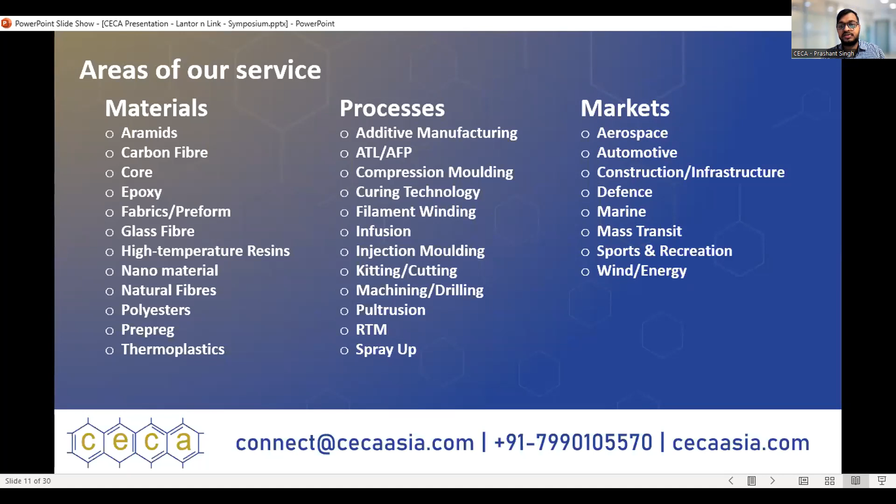The core support team of CECA includes Dr. R.K. Singh, N.C. Sharma, Chandran Kunal, Dr. Anshuman, Francois T, and Hiral Parekh ma'am.

If we talk about memberships, individual and annual membership is absolutely free. The honorary life membership is free, but it is nominated by the CECAASIA team. The corporate membership is a paid membership with ample benefits. The annual fee is 11,000 Indian rupees and 160 USD per annum. You can visit CECAASIA.com/membership to download the forms and see the benefits.

Professionals, academicians, professors, researchers, and students associated with composite manufacturing, polymer plastic industries, R&D, universities, and research and training organizations are invited to become members of CECA. The individual membership is absolutely free. Come and be the villager of World Composite Village. Help yourself and the composite fraternity.

CECAASIA has a big vision of making India the hub of composites. So be part of it, be a CECA member because it's absolutely free. Honorary memberships are granted based on recommendations from members, core members, and professional partners, and nominated by CECAASIA. Normally these are people who have served the composites field for more than 20 years and have made memorable contributions in their areas, and this membership is absolutely free.

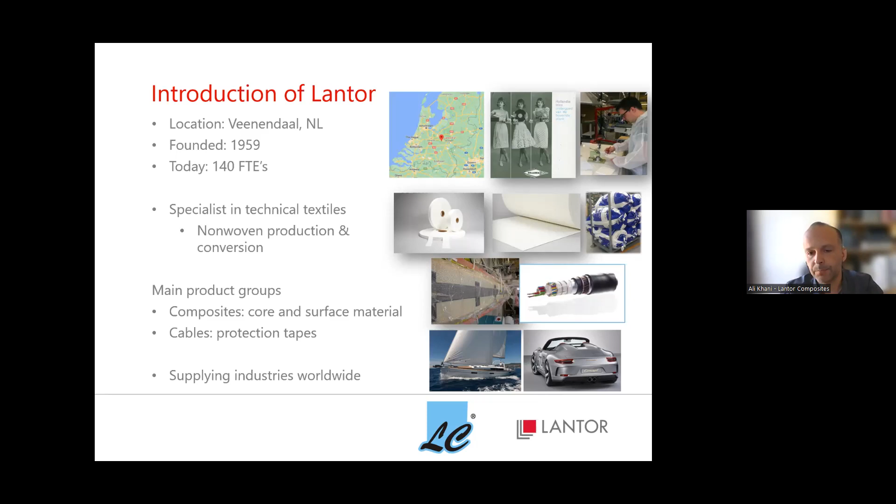We are serving different industries, and we are serving them worldwide. A large portion of our customers goes to marine, but also we are very active in other segments like automotive. So in the next slides, I would focus on the composites products.

So probably the first question which comes to your mind is, what is Lantor core made of? Most of our products are made of polyester fibers, which come from recycled bottles, PET bottles basically. So we process these polyester fibers in our production facility, and we make a non-woven veil, which is a base of most of our products.

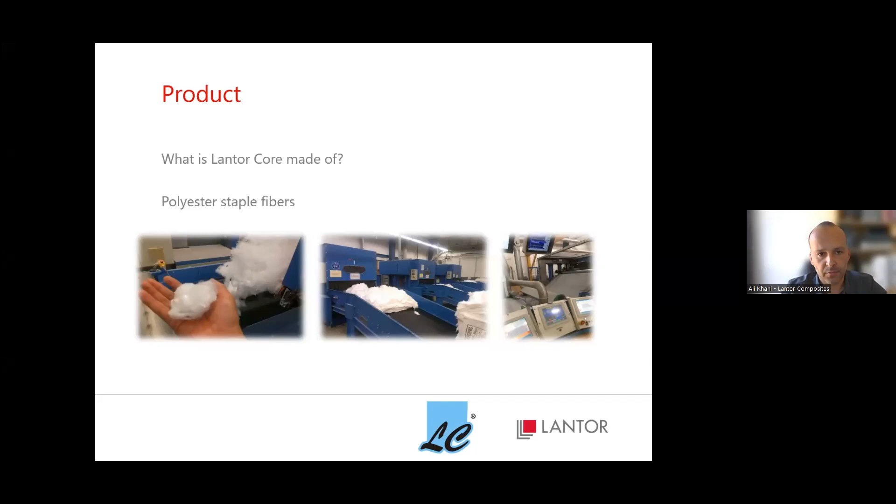Later in the process, we make a mixture of microspheres and binders. These microspheres are kind of small balloons in the micron scale, which include a liquid hydrocarbon, which under temperature becomes a gas and expands the microspheres, so they become bigger. Basically, these are very important elements in our cores, which are serving the lightweighting purpose of the core. So basically, these are like empty balloons in the core.

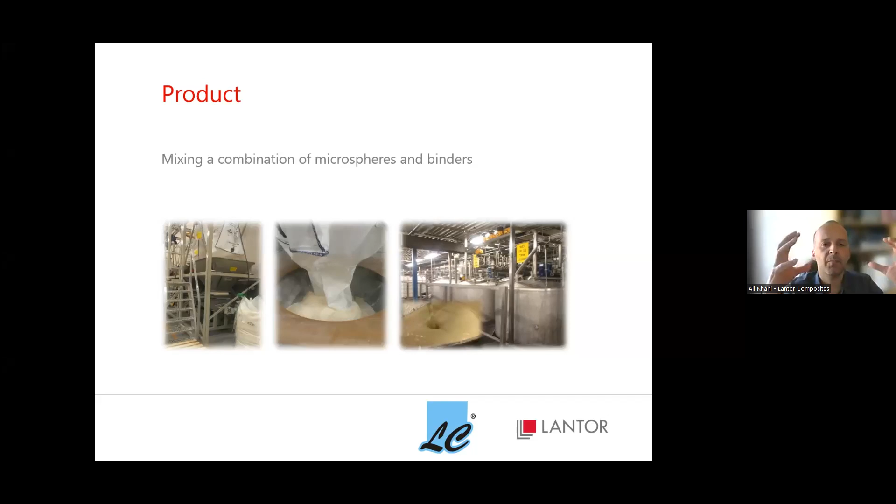Using this mixture, we print it on the veil that I mentioned, on the non-woven veil. We print this mixture, and then in this kind of machines that you see here, we basically fix the microspheres in their place. As you see, our products are coming out in the form of rolls.

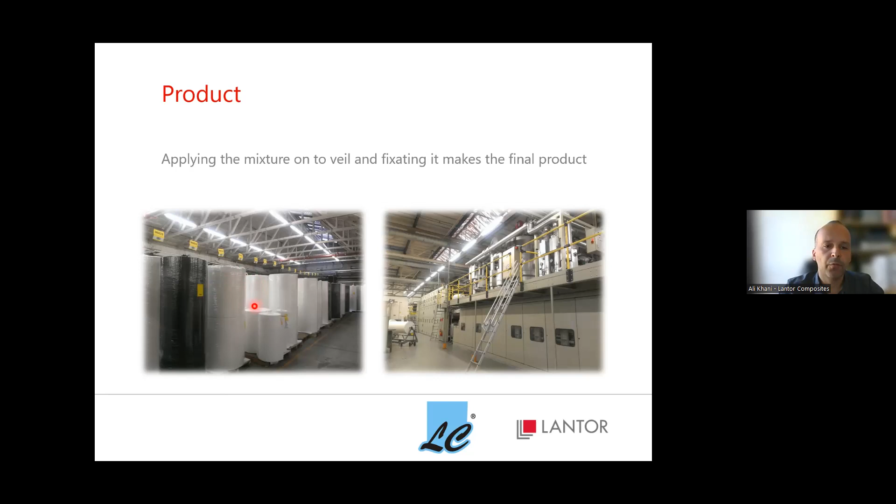So if you look at our products under microscope, at a larger scale, if you look at the surface of the product, you see this kind of structure. Of course, different products have different patterns. Here you can see a hexagonal pattern where you have some channels, and then an island in the middle. This island is filled in with these kind of expanded microspheres. If you look under microscope, you see this kind of microballoons, and there are these channels around which help the resin to flow.

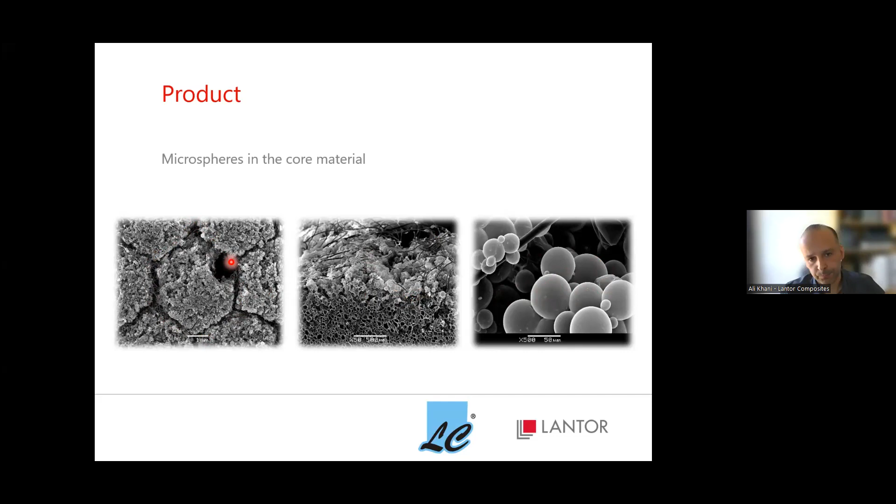So if you look at our cores, we have different brands, and basically the way we name them is related to the process in which they can be used, or they are aimed for that process. Coremat is designed for open mold processes, for hand layup. Soric is designed for vacuum infusion. And Teccore, which is a relatively new brand, is designed for higher pressure, higher temperature applications and processes like autoclave, thermopress, RTM, and wet compression molding.

And we have surface veils for improving surface quality, which is called finish mat. And we have also a combination of different products, like a layer of core together with a layer of finish mat, and together with a layer of reinforcement in one product, which we call skin core.

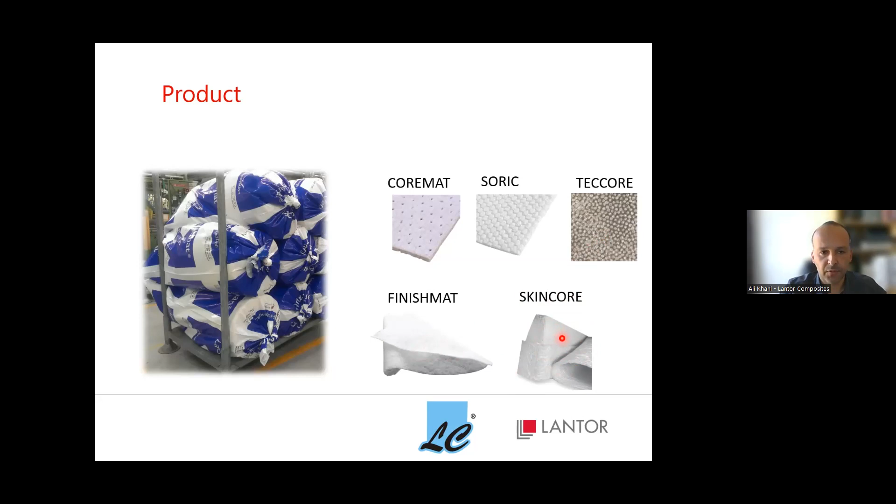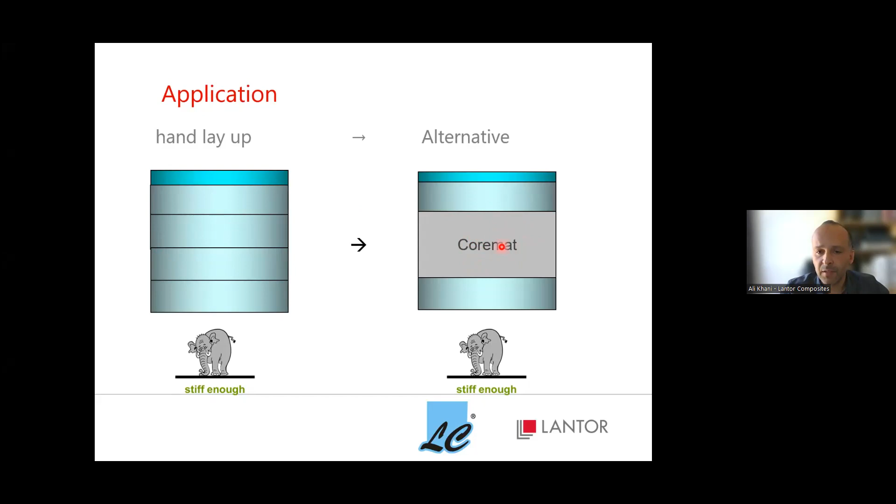So basically, by using Coremat instead of two layers of glass fibers, you are building the thickness still. Instead of placing multiple layers of glass fiber, you're just placing one layer of Coremat, which saves you time. It also saves the weight of the glass fiber, saves the resin consumption, and saves the cost.

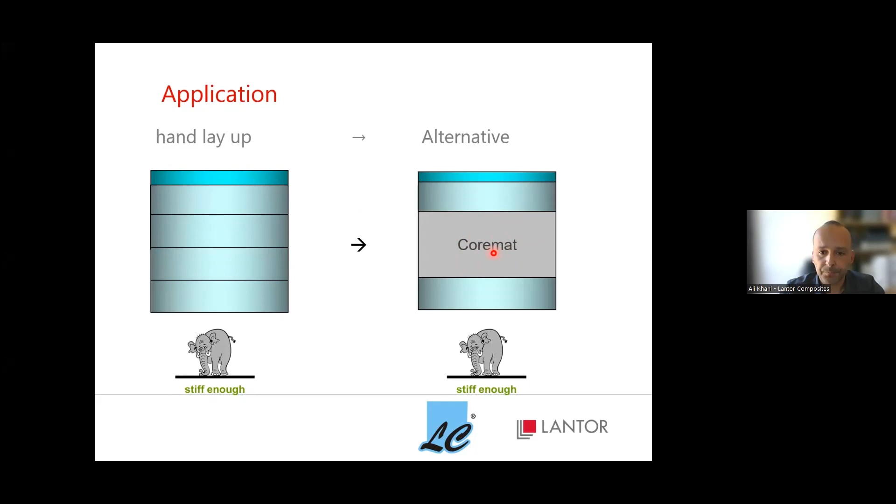Another advantage is when you want to move from a hand layup laminate to a vacuum infusion laminate. What happens is that because of the vacuum pressure, this is the same stack, but you see here you have much less thickness because of the vacuum and because of less resin absorption of the laminate.

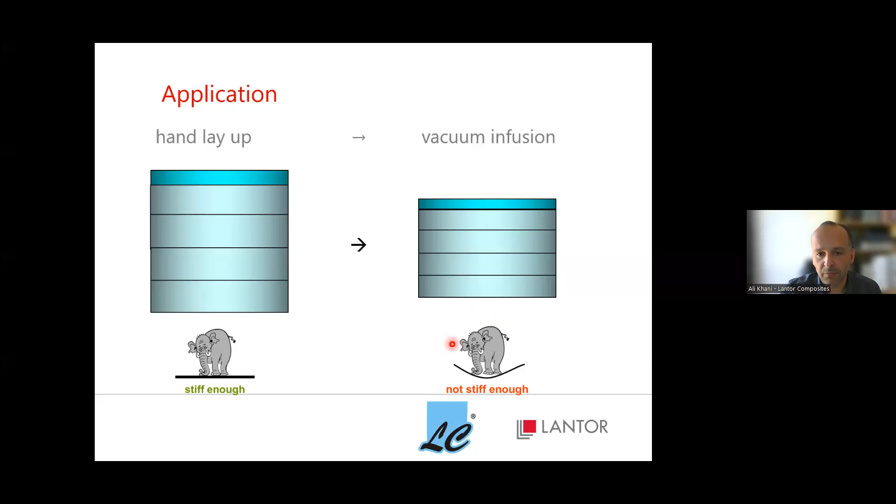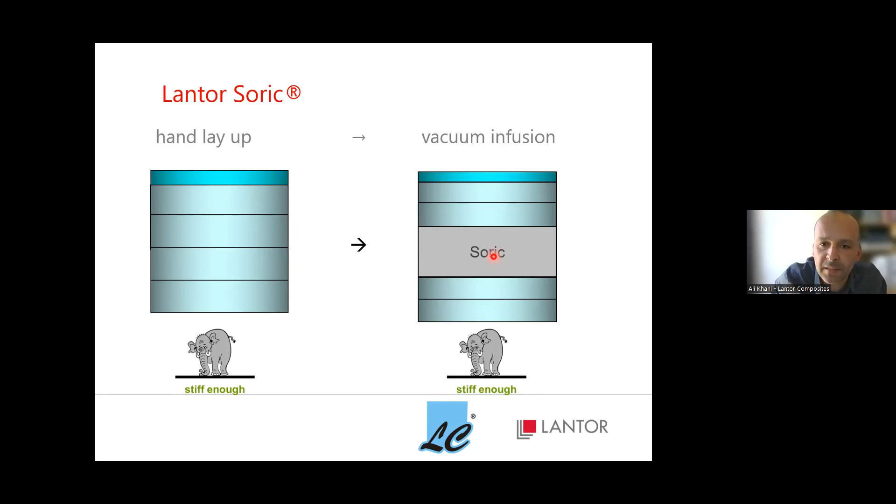So the less thickness translates to a bending stiffness which is not enough for your application. What you can do is place a layer of Soric in between these glass fiber layers, which helps you still build up the thickness and still have good stiffness. But it also helps you have a good resin flow. Basically, Soric, because of the channels I showed you, can easily facilitate the flow. Then you don't need to use extra material for facilitating the resin flow, like flow mesh, for example. It's not needed.

So what I would do here is go through these products one by one and introduce them. I would also show you some films of how these products can be used. And at the end, I would show you some applications in the transport segment.

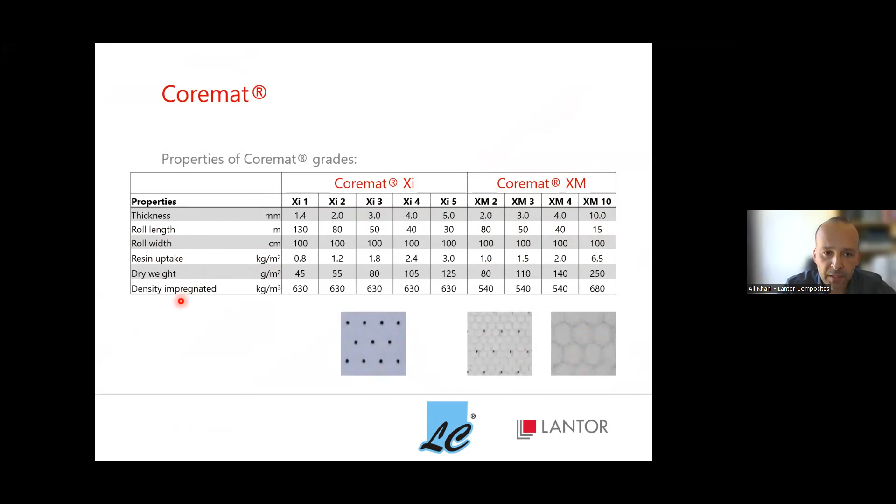So Coremat, as you see, we have two types: the Coremat Xi and the Coremat XM. You can see the XM here and the Xi here. There are different thicknesses, starting from 1.4 millimeter going up to 10 millimeter. Here you can see the roll length, roll width, the resin uptake per meter square, the dry weight, and the density of the impregnated core.

Here I have a film from my colleague, Mr. Wardstein. He's actually showing how to apply this Coremat in a laminate. I think that shows a lot about how to apply it, so I don't need to talk about it.

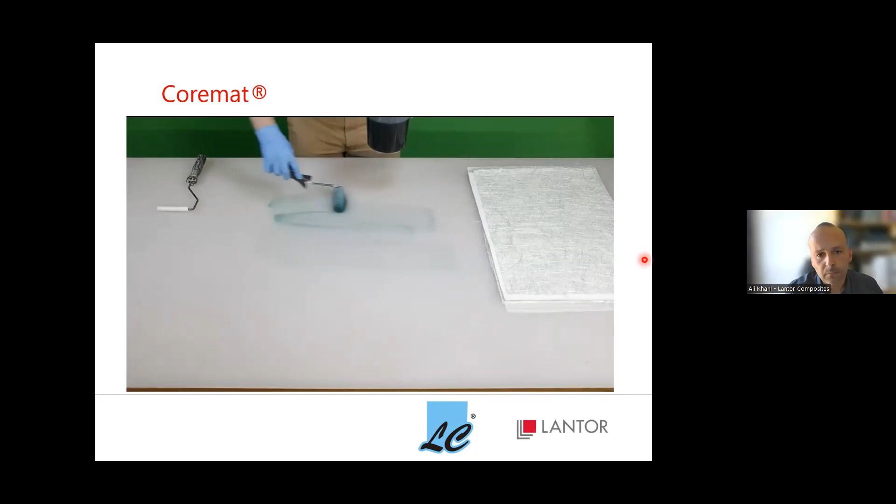Laminating with or without Coremat starts with applying a layer of resin to the mold surface. It is important to back wet fiber layers, which prevents air entrapment even after rolling with the aeration roller. The first layer of glass is rolled thoroughly into the resin before adding more resin as required.

We recommend applying the core mat on a wet or slightly gelled glass layer to get an optimal bond between the core and the glass. We do not recommend waiting until it's fully cured. Should your project not allow this, we recommend sanding the laminate before applying the core mat, even if you've used a peel ply.

Next up is the core mat. For this panel, we use the 4mm Coremat XM. The 4mm thickness creates the stiffness in this panel that we need for the application. It is important for the panel strength to fully wet out the core mat. To make sure we fully wet out the core mat, we pre-wet the front side of the core mat, which is the smoothest side.

We can roll the resin into the core mat without applying any force. We just have to make sure that the resin is spread over the surface of the core mat. To accomplish this, we use long motions, stretching the full length and the full width of the ply.

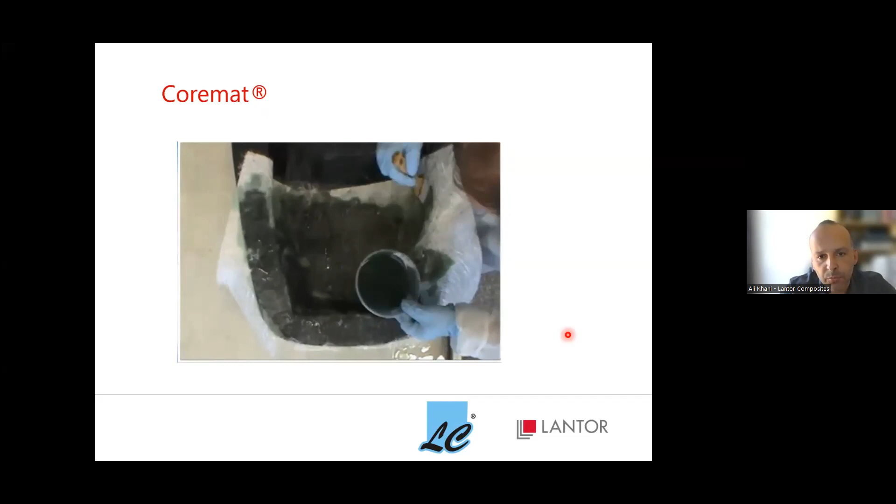Yeah, I have another film here. I think this is important to see this one. This is a 3D mold. Basically, one of the advantages of Lantor products is the flexibility and drapability of the core. So basically, you can easily, without any need for post-processing of the core, drape the core to any kind of 3D shape. As you see here, this is a 3D mold.

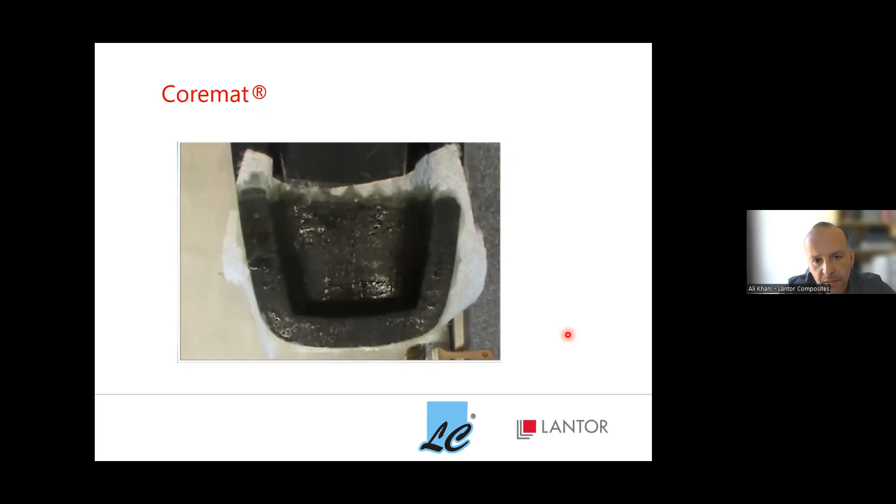Actually, the operator is placing the first glass fiber layer here. And subsequently, as you will see, he would place a layer of Coremat, this one, easily, and basically drape it to the shape. So you will see it in the coming minute.

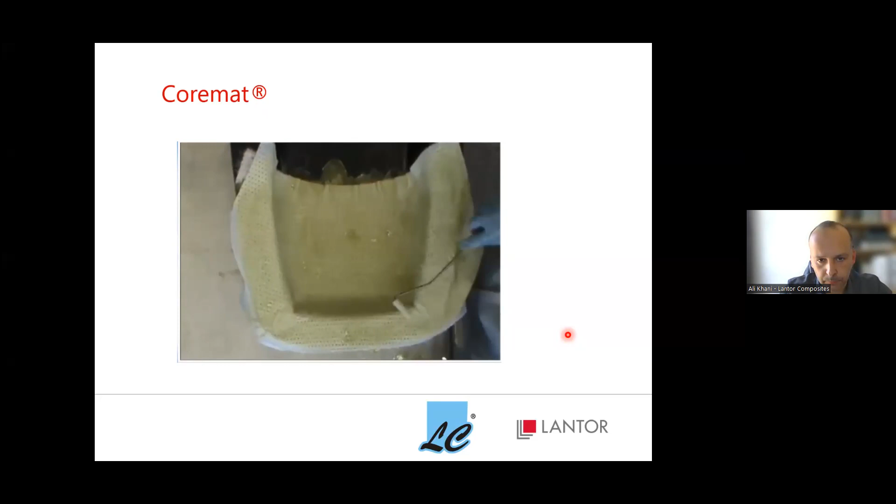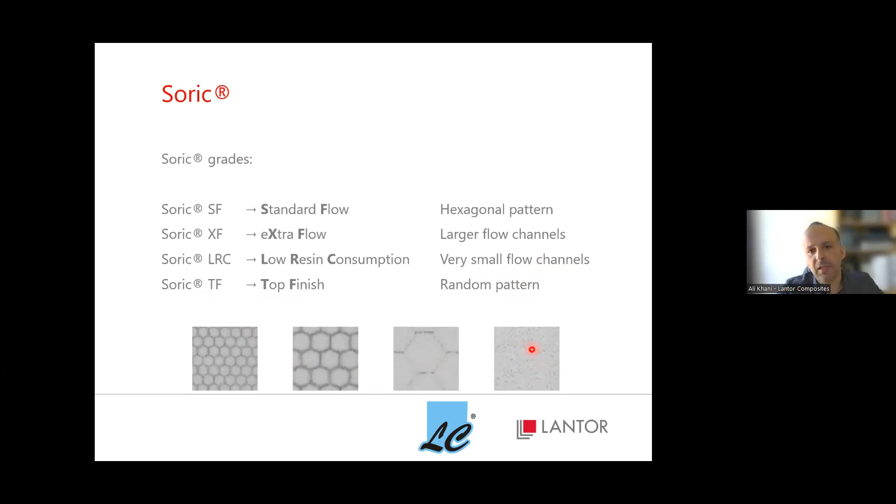Then we have Soric LRC, which stands for low resin consumption. So if you need to have a lighter construction with less resin absorption, this is the choice, which has very small flow channels. And then we have the Soric TF, which is used for top finish. So here you don't see any kind of hexagonal patterns, but you see a random dot pattern.

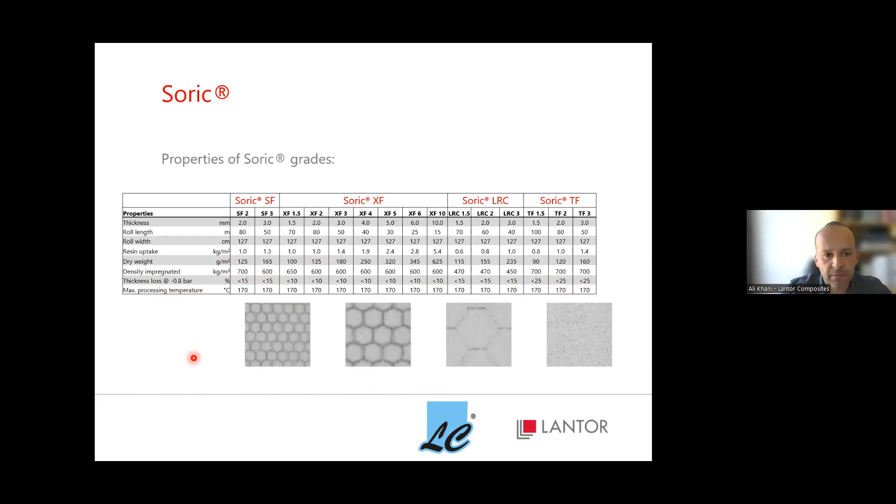This is the data sheet. Again, as you can see here, starting from a thickness of 1.5 millimeter up to 10 millimeter. Different roll lengths, widths, resin uptake you can see here per meter square. The dry weight of the core, the density of the impregnated core, and the thickness loss. So under vacuum, you would have something around 10 to 25% loss in the thickness, depending on the product. And all of these products can be used up to 170 degrees as the processing temperature.

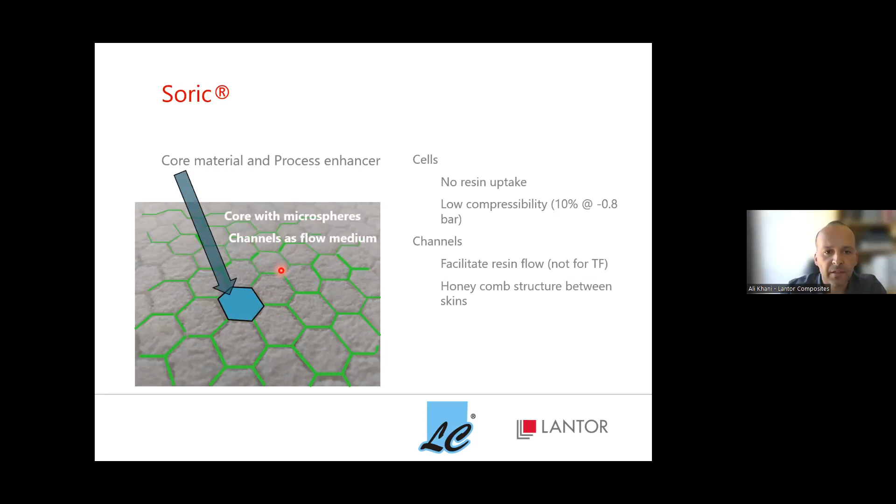So if you look at Soric, we see this kind of islands and then the channels around it. So first of all, Soric can have two different roles in your laminate. It can be used as a core material to build thickness and help you to have the same bending stiffness as before, or higher bending stiffness.

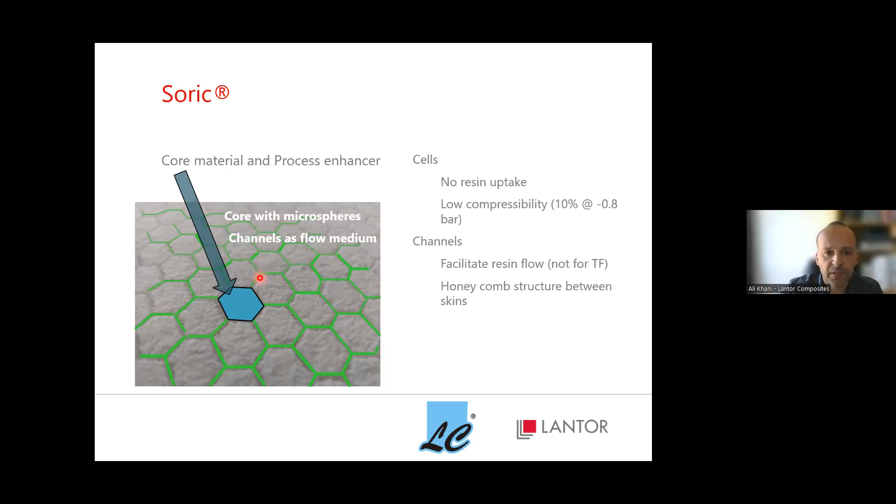But also it helps in enhancing your process. It helps in facilitating the flow. And the flow facilitation happens through these channels. So basically this Soric has two parts. It has these cells or islands, and it has these channels around it. So these cells, they don't have resin uptake, or they have a very little amount of resin uptake because they are full with the microspheres.

And they have low compressibility. So basically under vacuum, they may lose about 10% of their thickness. And then you have the channels, which helps for resin flow. And also after the laminate is cured, you would have a honeycomb structure between the skins because the resin has filled in these channels.

As you see here, the resin, if you have this reinforcement at the top and bottom and then Soric in the middle, the resin will flow longitudinally and then it can easily impregnate the reinforcements at the top and bottom because the distance here is much shorter.

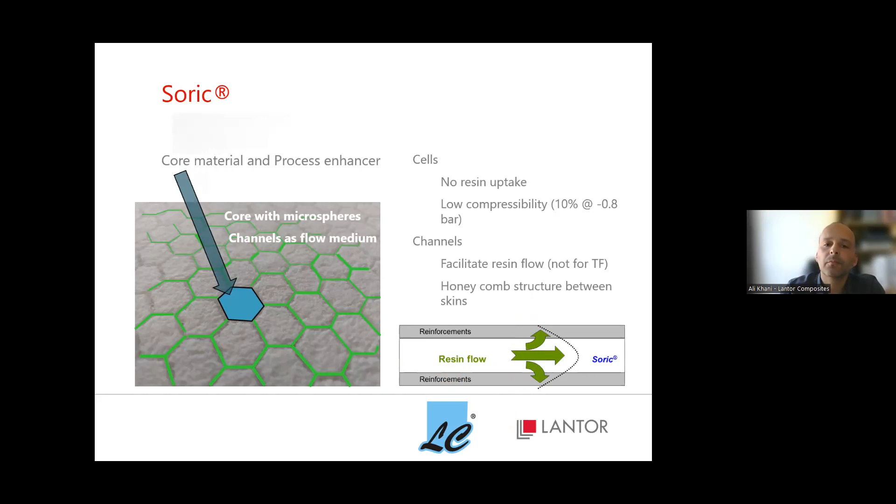Here I have a video for using Soric in vacuum infusion.

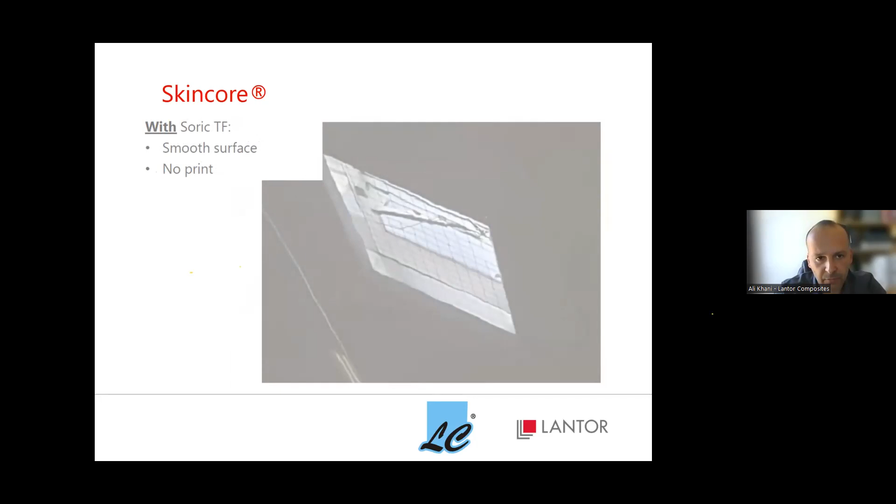Here we wanted to demonstrate the effect of Soric TF on print through. This is a laminate made with our Skincore, here made without Soric TF. From the reflection of the light, you can see there is some glass fiber print through and some core print through. In this case, when you make the same laminate with Soric TF, you get a smooth surface without print through. So that's the effect of Soric TF.

Moving to the next product, finish mat. We have different surface veils used for different applications. We have the D77, used for closed mold processes like RTM, which absorbs a very thin layer of resin at the surface. We also have finish mat D88 and finish mat 6691. These two surface veils are suitable for filament winding and pultrusion.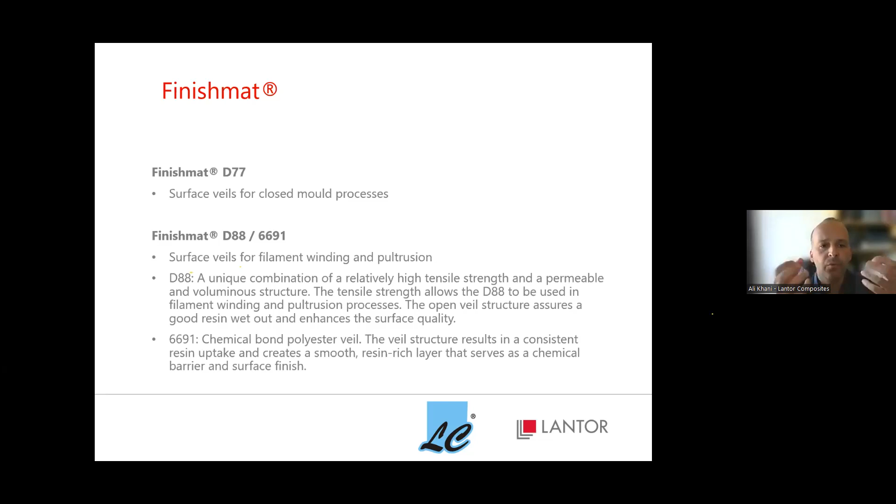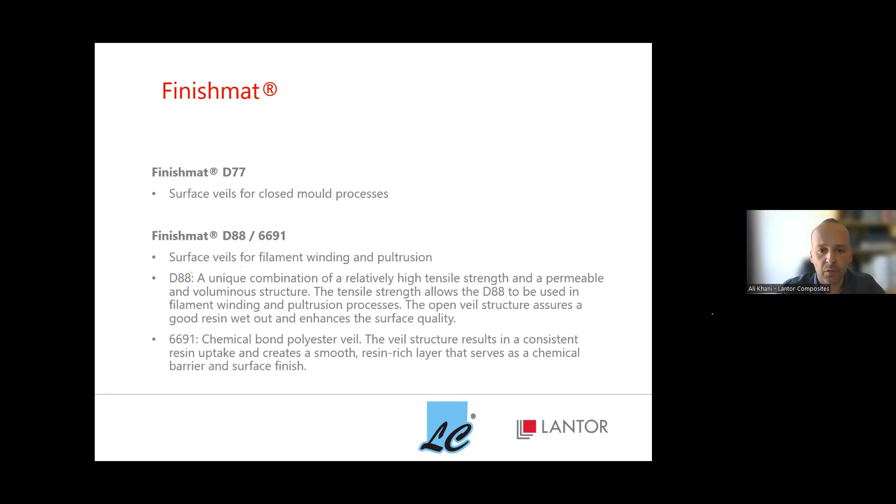D88 is a unique combination of having relatively high tensile strength but also a permeable structure. The tensile strength helps easily use this veil in pultrusion and filament winding, and the open structure helps absorb resin and enhance surface quality. These are needle punched - D88 is needle punched, and 6691 is a chemical bonded polyester veil. It also helps uptake resin, basically having a very thin resin-rich layer on top of the laminate, which serves as surface finish and also as a chemical barrier to protect the laminate.

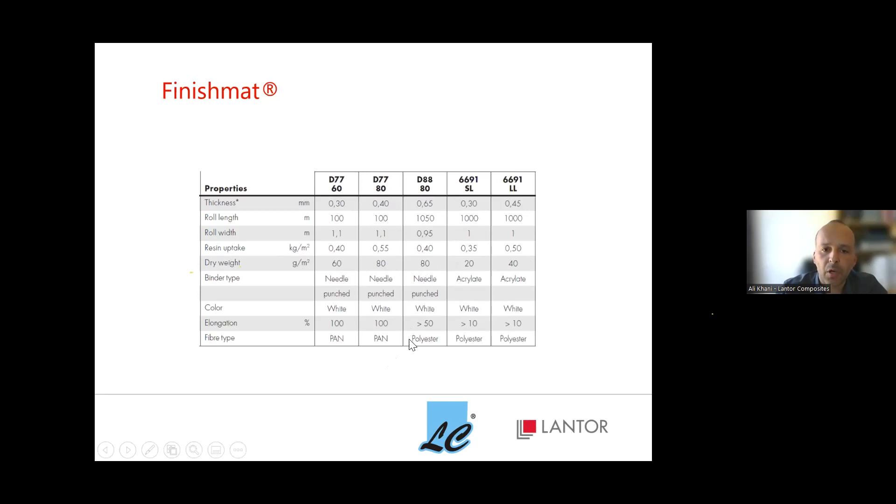Looking at Finishmat, this is the structure of different grades. This is the data sheet - you can see the thickness starting from 0.3 going up to 0.65. The roll length, the width, the resin uptake, the dry weight - it's from 20 GSM up to 80 GSM. We have the D77 and D88, which are needle punched, and the 6691, which is chemical bonded. Basically these two are the PAN fiber type, and the rest are polyester.

In terms of chemical resistance, the veils made of polyester fiber are slightly reinforcing. They help resist erosion, solvents, acids, also weather and harsh conditions, but they are opaque in resin. So for example, if this is a carbon visible laminate, we usually advise using the PAN-based or polyacrylic fiber-based veils, because that one becomes transparent in resin. These PAN-based fibers are also resistant to solvent, acids, bases, and weather.

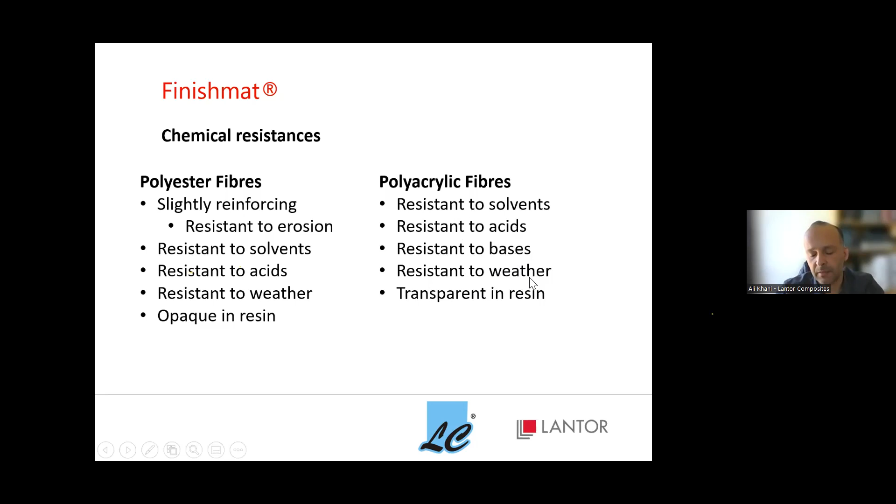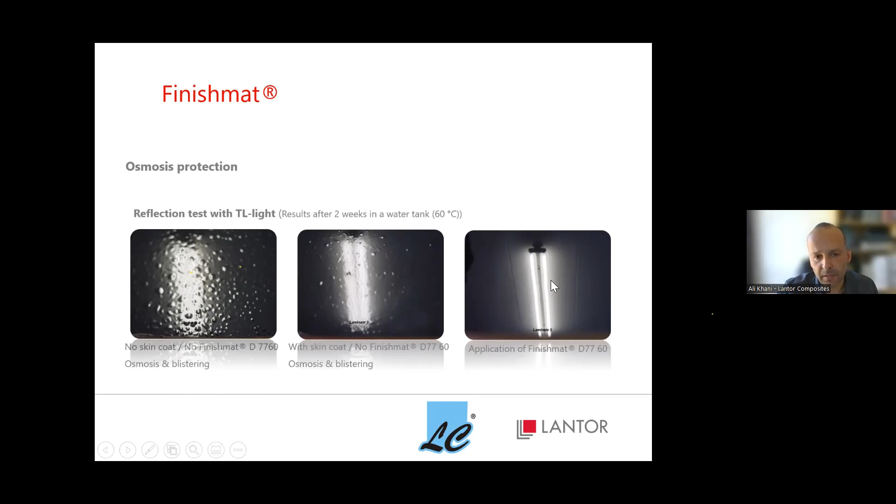As an example, for osmosis protection of the laminate using Finishmat, we have made 3 glass polyester-based resin laminates. This one is without skin coat and without finish mat. This one is with skin coat but without finish mat, and this is with finish mat. We placed these laminates for 2 weeks in a water tank at 60 degrees and studied the osmosis effect. You see a lot of blisters happening here, a little bit less here, and when using the finish mat, you see this surface without blister.

The next product is a relatively new product called Teccore, which we are still developing new products within this brand. As mentioned, we name our products based on the process in which they are used - so Coremat for open mold and Soric for vacuum infusion. We are developing this Teccore brand for higher pressure and higher temperature applications, for processes like RTM, autoclave, thermopress, and wet compression molding.

As you can see from this chart, I have compared the pressure and temperature resistance of these cores during processing. The lowest is Coremat, then you have Soric, and then the Teccore variants TG90 and TG120. The most resistant core under temperature and pressure is the TG180 HP. This resistance comes from the type of microspheres used in these products. For example, for TG180, the microspheres only become active when the temperature reaches around 180 degrees, and they can still be effective up to 220 degrees - that's the range where microspheres are still efficient.

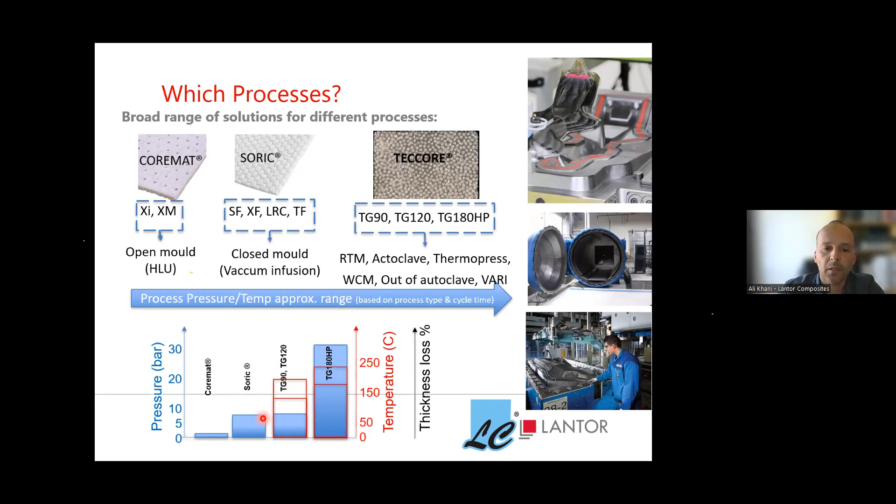For the other products, like Soric, the range of temperature is between 125 to 180, 185 degrees - that's the range where microspheres become active. Of course, it is a combination of pressure, temperature, and duration which determines the resistance of the core. As you see here, when you apply pressure, you would lose some thickness of these cores. I will show you in the next slide.

Basically, we have 3 commercial products in this brand. Of course, we are developing further, and we have some R&D variants also.

But what we have now is 3 cores: TG90, TG120, and TG180. So basically this is 90 GSM aerial weight, 120 GSM aerial weight, and this is 180. The initial thickness is between 1.5 to 2 millimeters.

So depending on the resin that you would have, depending on the temperature the process is at, and in which order the pressure and temperature are applied, these are all things which determine the residual thickness of the core in autoclave, or in thermopress, or RTM also.

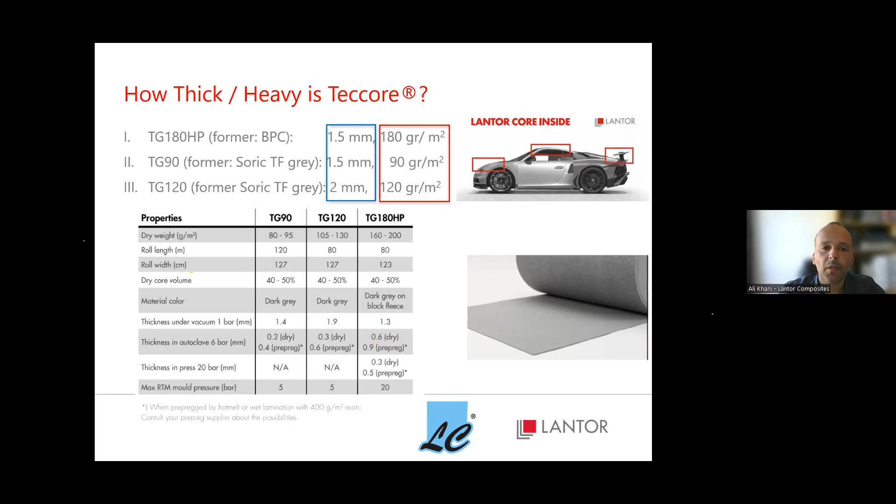Here, some laminates are based on a woven prepreg and this thermopress cycle. So this cycle is 20 bar, 140 degrees, and 5 minutes. And we had made two types of laminates: a monolithic laminate, and also a laminate with one layer of Teccore TG180 added in between the carbon layers, so in the middle.

So here we have plotted the panel stiffness versus panel weight. The blue line shows you the monolithic laminate, and the red line shows you the micro sandwich, which is made by using the Teccore layer in between.

So as you can see here, if we have two laminates which have the same weight, like 1500 GSM as the panel weight, you can see that for the sandwich option, you have about 40% improvement in the bending stiffness. And on the other hand, if you have the same panel stiffness, you can see that for the sandwich laminate, we have about 200 GSM lighter weight.

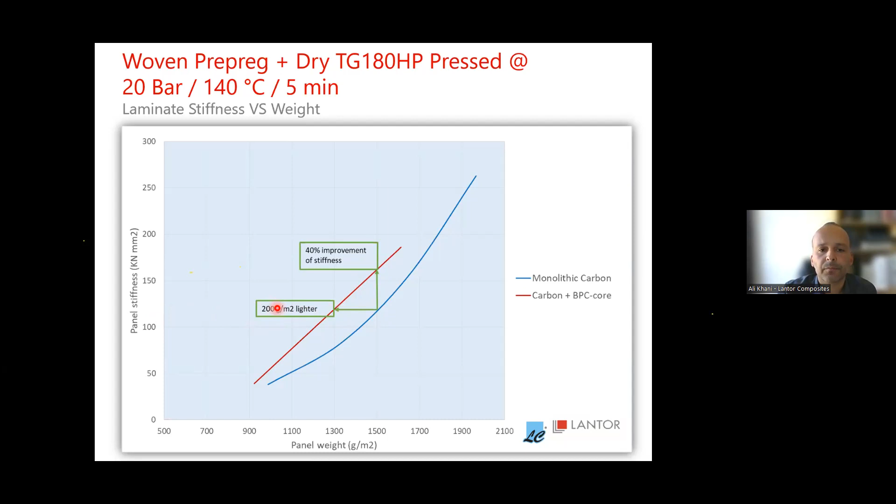So the same effect you should be able to see in the material cost and also the environmental impact of the laminate. So going from monolithic to a sandwich laminate, we save the cost.

So basically we can either substitute a few layers of carbon by using the core instead of carbon layers. That helps in saving the cost and also reducing the environmental footprint.

So if you have, instead of a few carbon layers in the middle of the laminate which don't have that much effect on the bending stiffness, you substitute it with a Teccore layer made of recycled fibers, you are replacing carbon layers, which are very energy intensive in terms of production, with some recycled material. And you are reducing the carbon footprint of the total laminate.

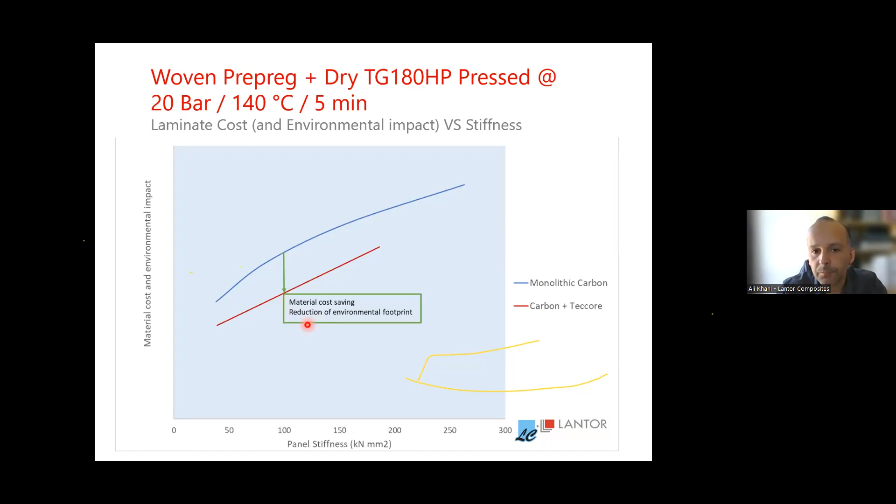So there is one subject about high volume production. As you know, processes like autoclave, hand layup, or vacuum infusion are basically for low volume production. But when we are talking about the transport segment, sometimes we are talking about really high volumes.

This means we have to use production methods which have shorter cycles and are basically suited for higher volumes, or continuous production methods. And the good news is that Lantor materials are basically adaptable to most of these production methods, as I mentioned in the previous slides.

For example, for RTM or for wet compression molding, where you have higher volumes, you can use our products. But also...

If you look at a bus, for example, a bus structure, you can probably see a frame which is made of profiles and panels, so really large panels. And basically, both of these elements can be made with continuous production methods. So they can be produced by pultrusion, the profiles, and the panels can be produced by continuous lamination.

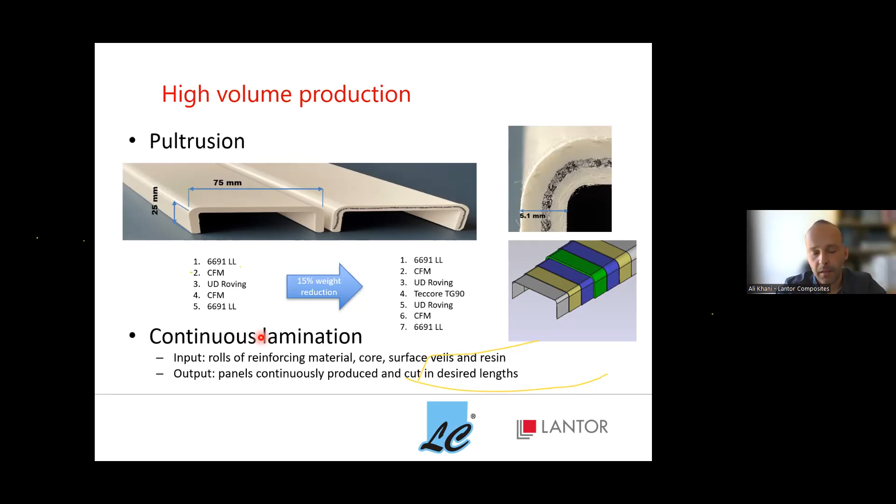And also continuous lamination, where you have rolls of reinforcement material, rolls of Lantor core and surface veils, and resin all going into the continuous lamination machine. At the end, you have panels continuously produced, which you can cut to the desired lengths. So basically, the products are easily adaptable to high volume production.

I have a few slides about material performance. Here we have the Coremat laminates, basically a laminate made of 600 GSM biaxial glass as the top and bottom layers, with a 3mm core in between. These laminates are made by hand layup for Coremat, or by vacuum infusion for Soric. We have compared them to a few foams and also cork.

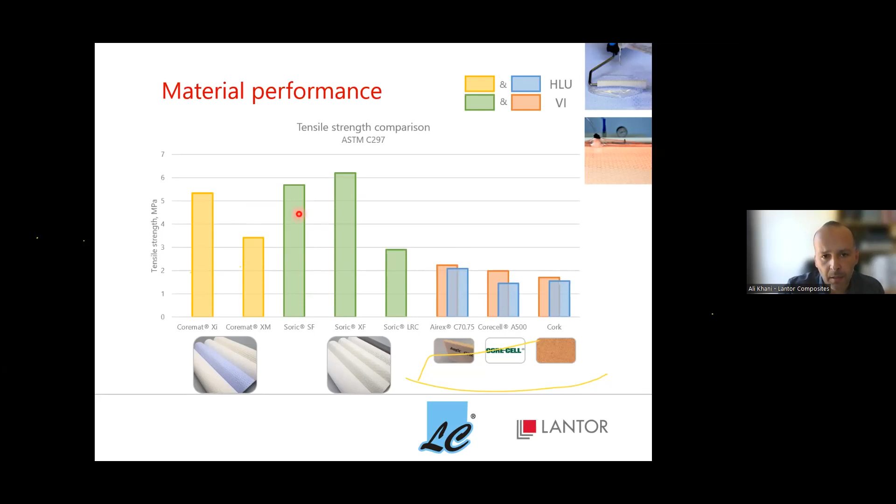In terms of tensile strength, this is a flat-wise tensile strength test which we do for our product type certificates. Again, Soric and Coremat are doing very good compared to the foams. The shear strength shows really higher values as well, and compression strength also shows really good values.

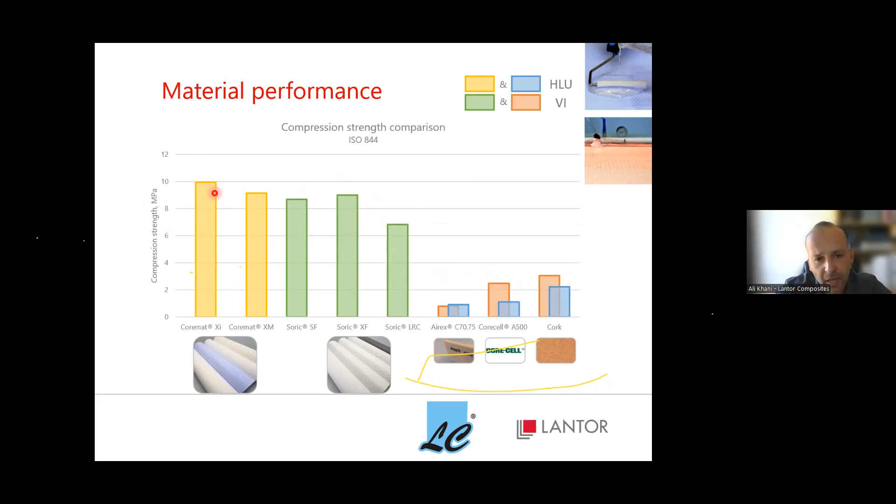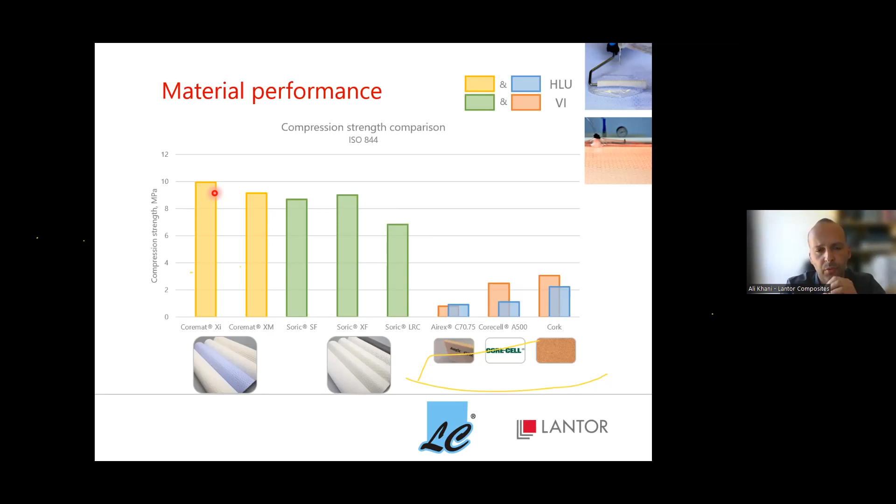The reason behind it, that our cores behave very well in terms of mechanical properties compared to foams, is that the core allows the resin to impregnate through it. This resin impregnating through the core makes bridges between the top and bottom skins, which contributes a lot to mechanical properties.

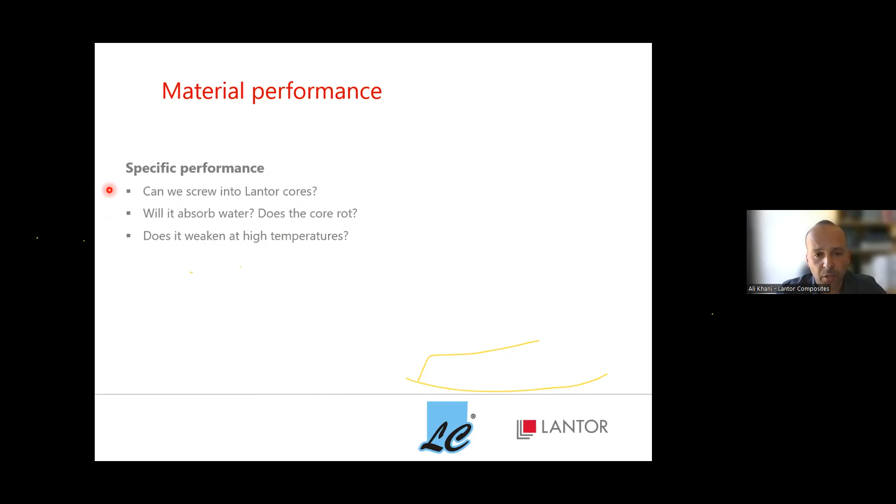There are some specific performance questions also, for making structures. Can we screw into Lantor cores? Will it absorb water? Does the core rot? Does it weaken at high temperatures? The good answer is, yes, we can easily use screws to fasten these parts.

Here I have a comparison of different materials in terms of screw holding capacity. Per millimeter depth of the screw, you need a certain force to get the screw out of the part. For CSM chopped strand mat glass with 20% glass, this value is the highest, 22 Newton per millimeter. Then you have plywood, and after that Coremat and Soric. Then balsa, PVC foam, and polyurethane foam, they basically cannot have any screw retention.

Will it absorb water? Basically, we do tests for our type approval. We place the laminates we make in a water bath for 28 days at 35 degrees, and measure the mechanical properties afterwards. This should not drop, and we see that it does not drop.

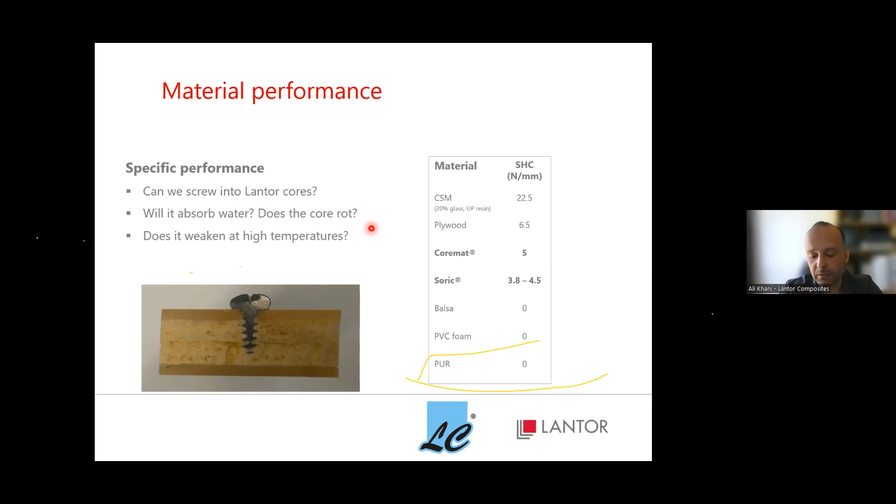Does it weaken at high temperatures? Again, we can answer by the fact that most of the integrity of the laminate, when using our core, comes from the resin, because the resin goes through the core, impregnates it, and makes a structure there. So behavior at high temperatures is dependent on the resin and not the core.

I have some impact studies also we have done for two laminates, a full glass laminate here and a sandwich Soric laminate. These two laminates have the same bending stiffness. This sandwich laminate is designed such that the bending stiffness is exactly the same as the full glass laminate. And you can see here the impact tests.

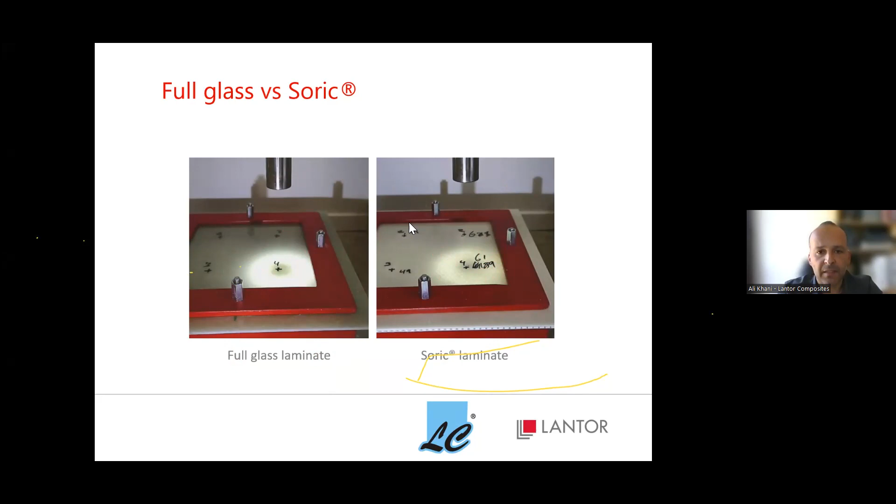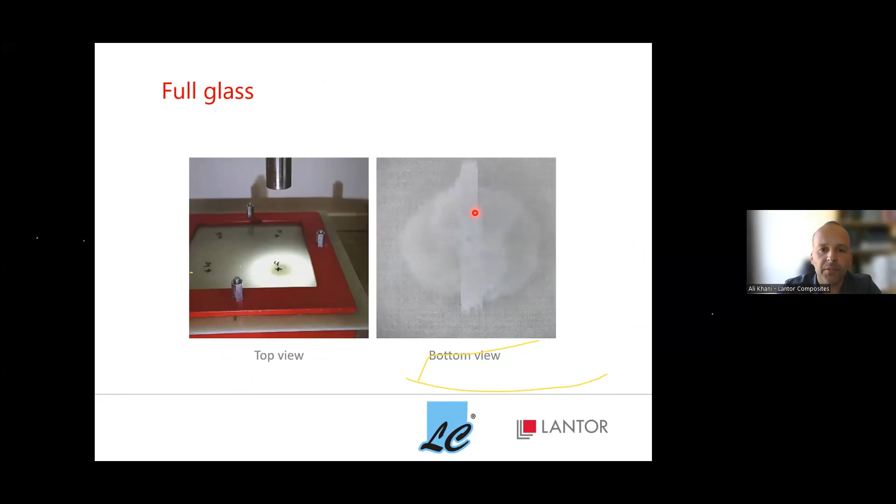Here is the top view and the bottom view of the full glass laminate. Let me check if I can play it again. Yes, so this is the bottom view, and you can see this bottom glass layer is broken.

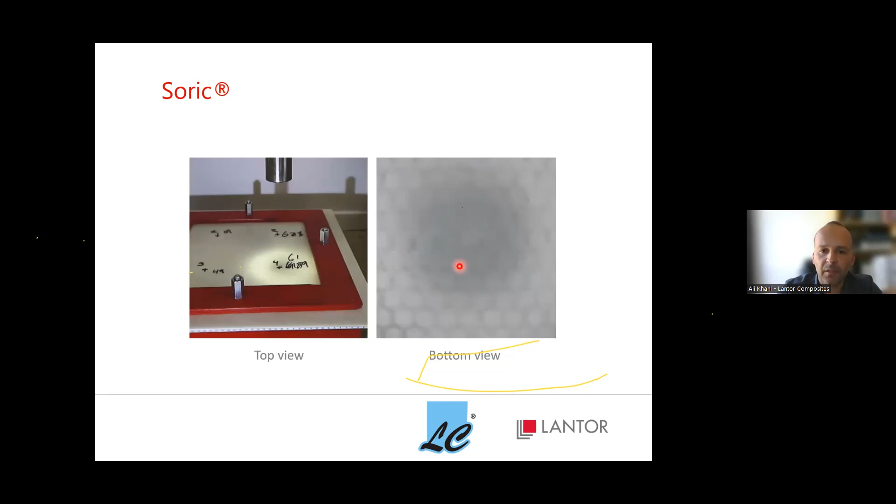And we have the Soric option also, this is the bottom view. You can see Soric is absorbing most of the impact, and the bottom glass fiber layer is intact, it's not broken.

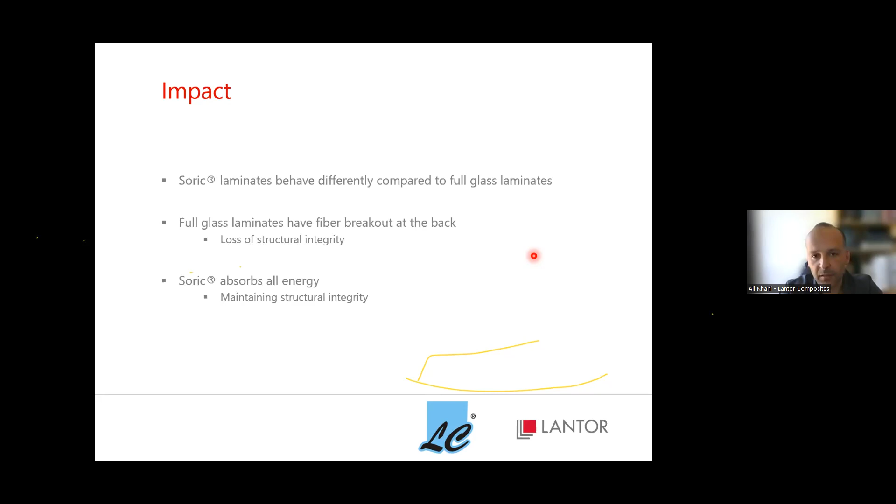So basically this says that the Soric absorbs all the energy. This is one of the important properties of these sandwiches, where instead of a monolithic structure, you have a sandwich with two skins. If under impact one of them is damaged, the other one can still be intact and protect your part or your vehicle.

Here I have some application examples for the transport segment. For buses, this is a company in Czech Republic using our Coremat Xi for bus panels to save weight, and also to quickly build up the layers, because they are using hand layup.

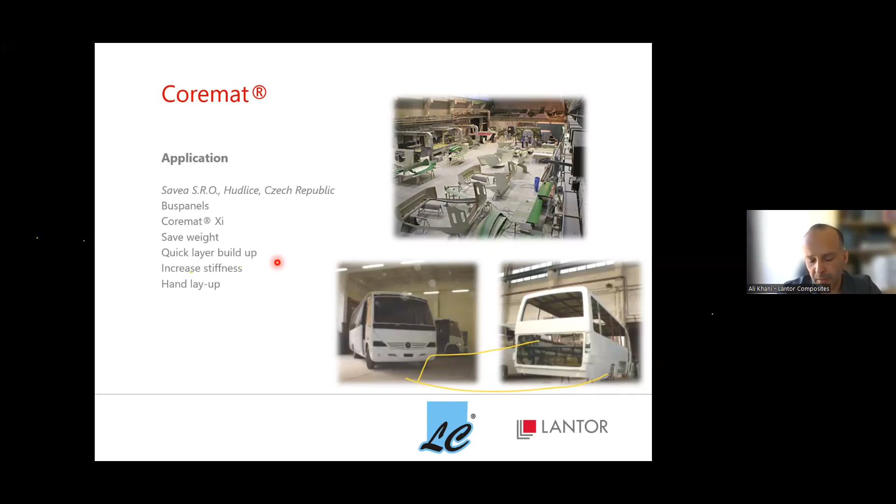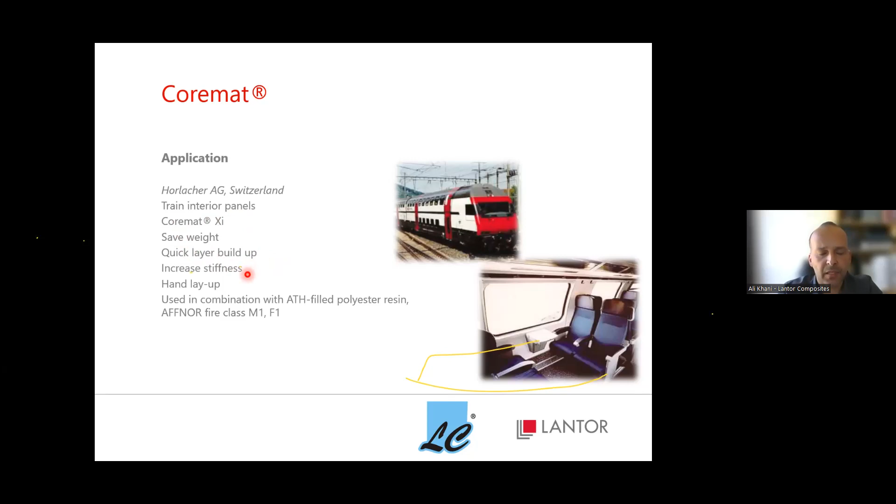So they can quickly build up thickness and also use it for increasing the bending stiffness. Another case is in train interior panels, where Coremat Xi is used. Again this is a hand layup process, used in combination with ATH filled polyester resin for fire retardant properties.

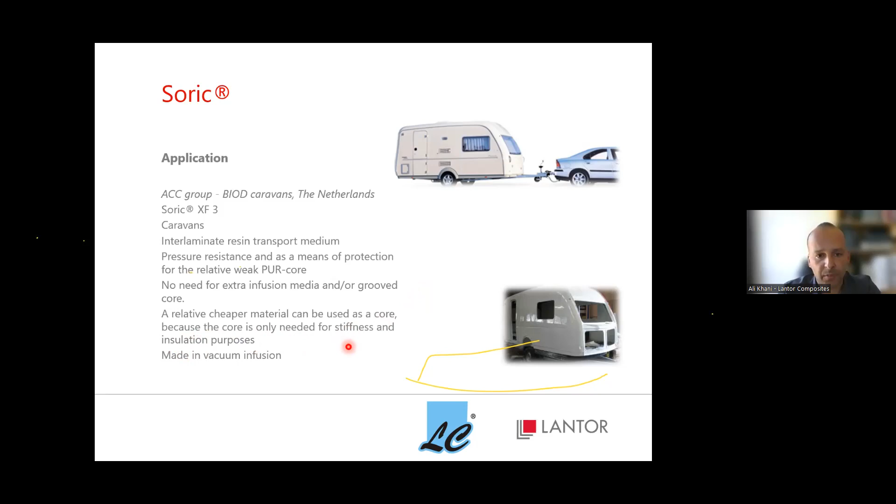It helps to save weight, quickly build up the layer, and increase the stiffness. Another case for caravans, Soric XF3 is used in vacuum infusion. Basically it helps the resin transport because it has channels. It's used in combination with other cores, like polyurethane core. There is no need for extra infusion media, or for grooving the core. It helps to increase the stiffness also.